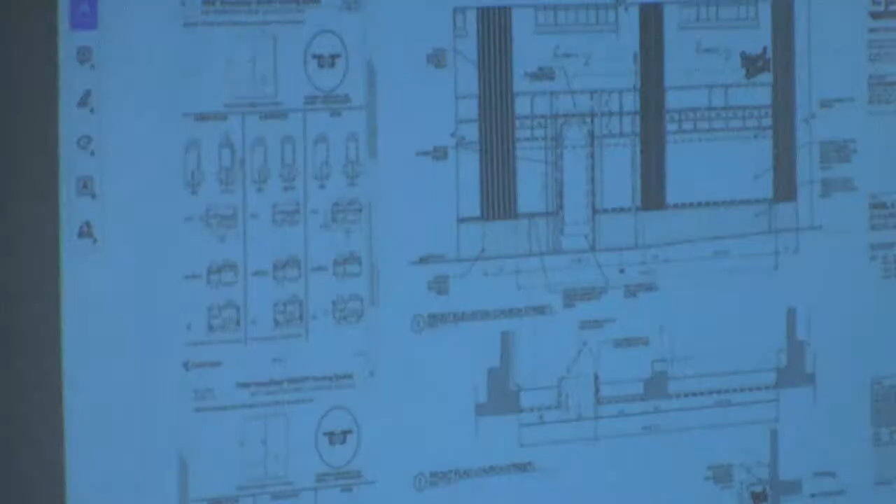Basically, that storefront, which is shown in the details on your sheet here - this is a little out of focus, but the glass is forward. The last system we had, the glass was in the middle, so you were seeing heavier shadow lines and more of the framing system itself. This one, the glass is brought forward, similar to the existing condition of the glass in the aluminum storefront that's there right now, as seen on the building's facade. Those are some of the biggest changes that happened.

And what is your proposal now for the bulkhead, the marble? What we discussed on site, when we asked if you guys would be able to mimic what that other storefront had - that conversation we had. So we're proposing that we skim coat it, and then have it mimic what was at that other storefront that we went over on site.

Okay, so I think then there was the framing system, the placement of the door, and the bulkhead were the 3 main things. We also made this door recessed as opposed to before, when it was flush. Yes, so it's pushed in a little bit as well. This was something we discussed openly on our last hearing together - the 8 inches rather than being flush. So it's being recessed back.

So the door will not be as recessed. You're bringing the door forward. We're still bringing the door forward. Currently, off the top of my head, I think it's 30 inches recessed into the storefront opening, and what we're proposing is to have that at 8 inches recessed rather than 30. So still bringing it forward, and we're still looking to meet the ADA requirements for an accessible entrance. We're also trying to improve the storefront glass by making it insulated and thermally broken.

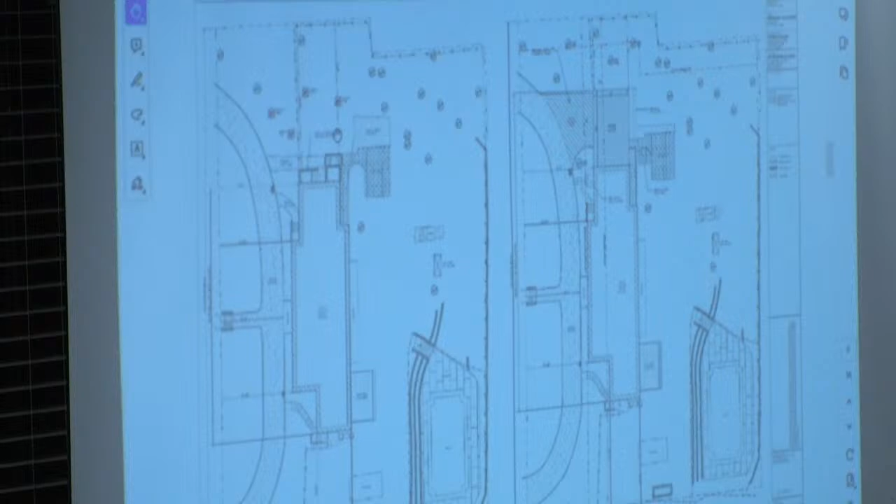So, Center Hall, Spanish Colonial Revival. On the right you have the southern extension, that's the family room with the traditional arched openings. Our addition is proposed to be on the north end, to be flush with the extension.

That extension currently houses a service stair and a mudroom. That mudroom, I think, originally was outdoor space. Right now it has infilled panels and windows, but I believe originally it was an open porch that provided access to the kitchen — essentially a service porch.

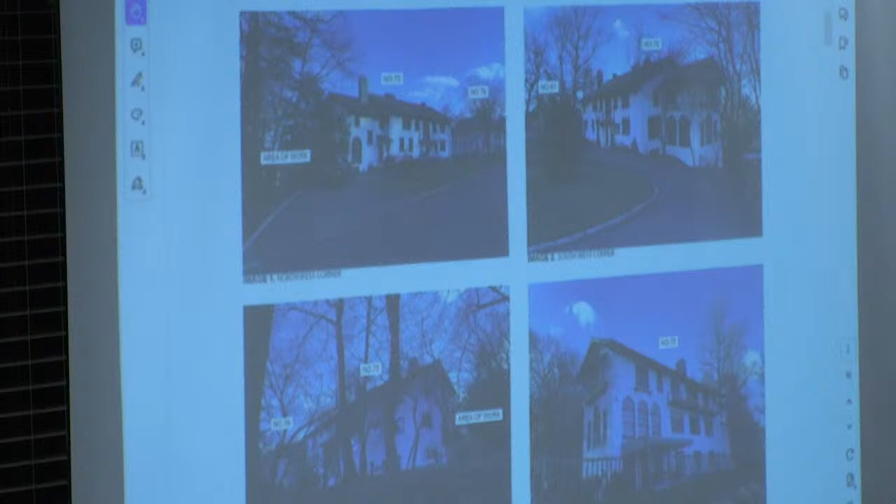In terms of mass and scale of the garage, we're proposing a minimum roof height just to allow the cars to get in, so you end up with an eave slightly over 10 feet above grade.

To the left is the existing extension roof below the main center hall roof gable. To the right is the proposed garage, which is an exact replica of the existing low slope gable roof, with an eave extension to match. As I get into the details later, the brackets, eaves, and rafter tails will all be specified to match existing.

The second part of the project is an entrance canopy for the mudroom with a bracketed canopy in the same location as the current mudroom. For that, we're proposing a hip roof, which I think is a modest complement to the central front entrance, which is flat, and then the service stair, which is a shed roof.

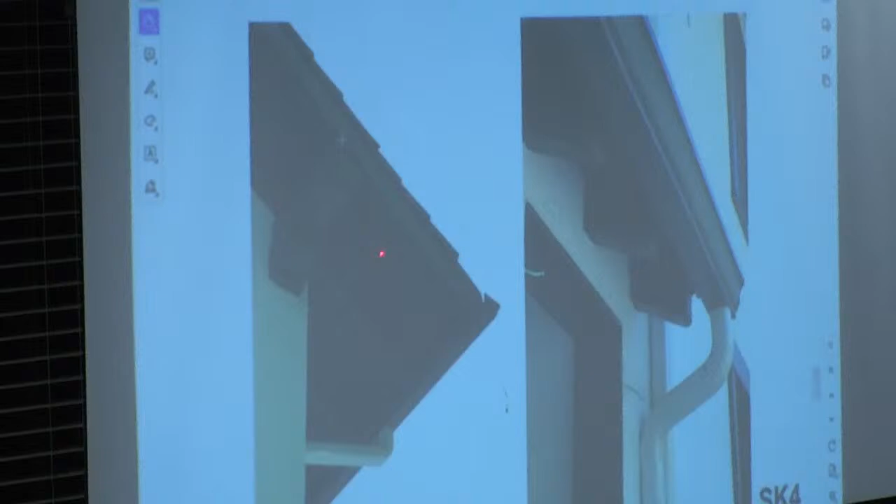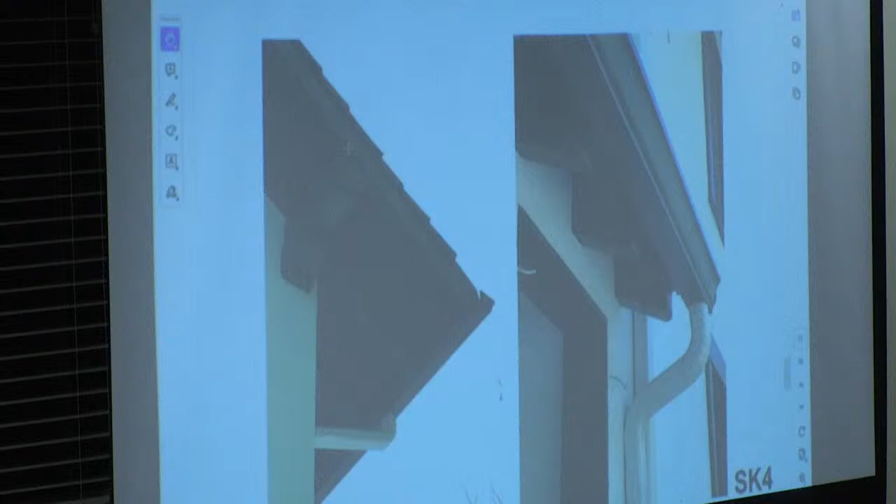For the eave details of the roof, we would match the brackets at the rake and the rafter tails at the eave. For the mudroom's new door canopy, we would match the rafter tails that are currently on the service stair shed roof.

The image to the left is the current state of the front door. It was painted. The owners would like to strip the paint down to the original wood and stain it a medium brown color.

The door to the right is the service stair entrance. They would leave that alone.

The new mudroom entry door would also be wood, stained a medium brown, and we would try to match the stained color of the refurbished entry door as well.

The garage door, because of its exposure, we think should be a faux wood door — a typical Clopay Canyon Ridge style. It's a panel door with transom lights and metal straps.

We think it should be faux just for maintenance. For the color, they have a selection, so we'll try to best match it after the doors are stained.

The windows right now are insert Andersen windows. They're black, and the trim is green.

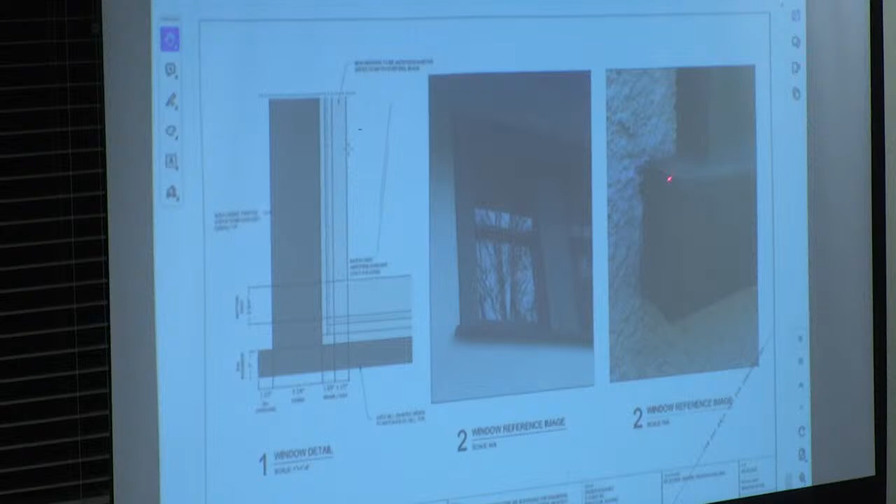The cladding for the windows and doors has been some type of vinyl covering each window and door. We would instead use something like PVC AZEK, painted to match that color and matching all the dimensions of the sill and casings, vertical and horizontal.

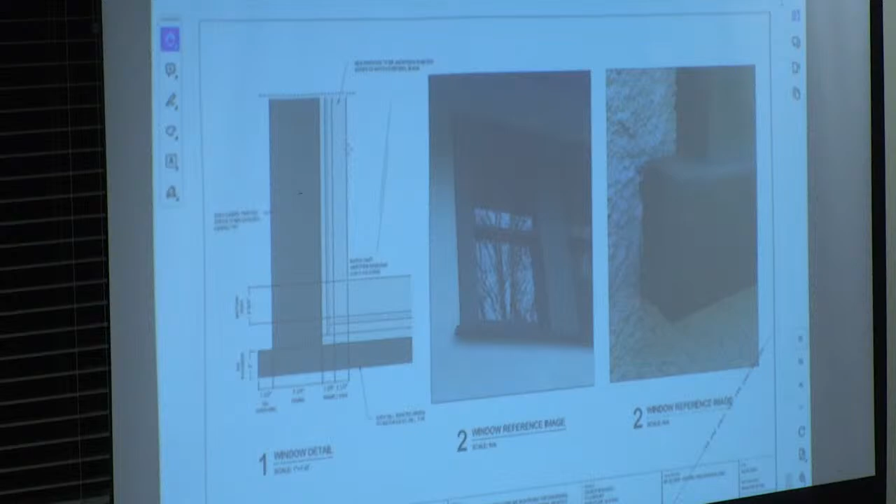And that's all I have. Okay, thank you. Maybe you could go back to your first slide that shows the layout, the floor plan. Yes, that's good. All right, thank you very much.

So we'll start with questions from the commissioners, okay? Mike?

So are you changing all of the trim everywhere to brown stain, or is it just the areas that you referenced? Just the front door. Didn't you also say the garage door was going to be that color as well? The garage door will be new, but the color will be the same as the front door. And there were no other areas where you wanted to strip the paint and stain it? Just the front door.

Okay. And then can you show the elevation where you're putting in the, can we go to the side? Is there any way to make the window, well, I guess you want to match the windows up top. I was just wondering if there's a way to call back to what's there existing, the arched door, but I guess.

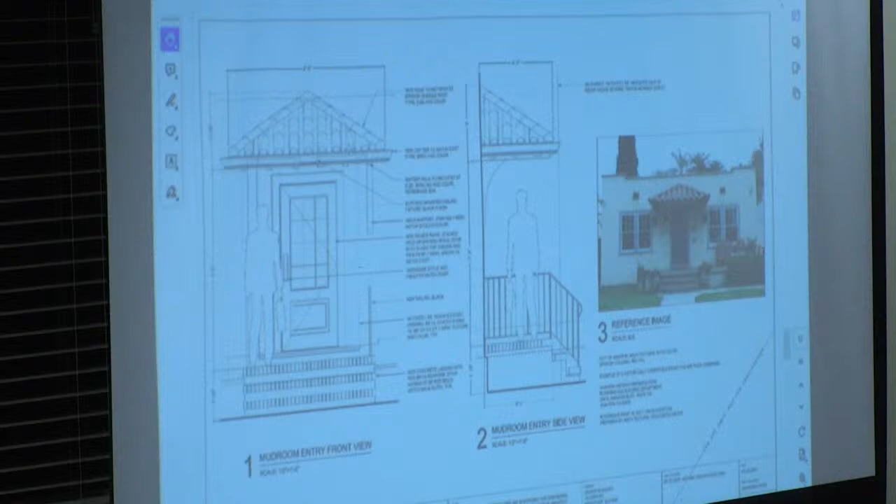To that new addition. All right, and then can I just see the new entryway also, for the mudroom? And currently they have that, is that arch original, the window that you're going to be demolishing? I think it's here. It is, right? Again, yes, original, but it was open, an open service porch.

Right, so is there any way for the design to call out that arch to keep, is there any way to keep that arch for that new door? You mean here? Yeah. Well, if you did, then you wouldn't have a canopy. I'm just thinking it would look more appropriate to the original 1912 design if you kept the arch. But it served an outdoor space, so we have a canopy for an indoor space, which is why I think this is more appropriate than an arch.

No, I understand that, but we are losing a historic element by making that change. So I'm asking if there is a way to maintain that element, the arch, because it does change the original look of the house. I agree it changes it, but I guess I would say I think this is a more attractive update of that historic look, so I'm not sure why you would want to keep that. Because it's the 1912 design, that's the reason.

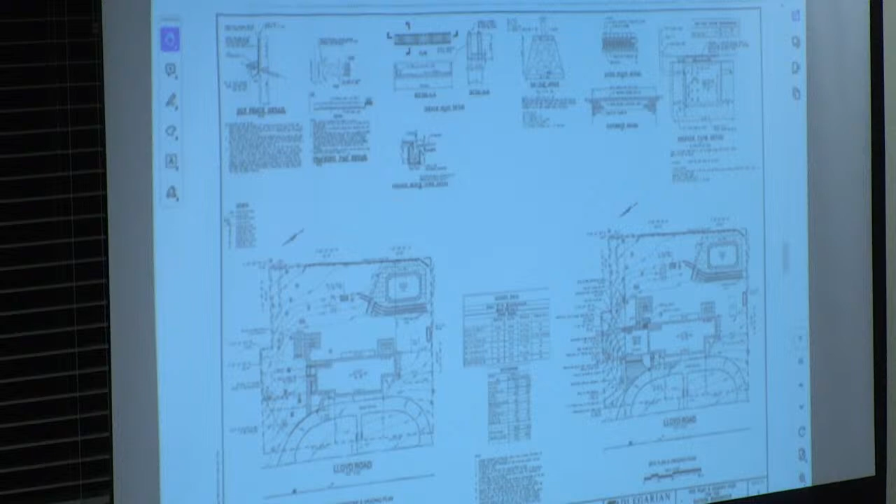So the door can't open up to the north? I don't think that's practical. Okay. I know, because we try to discourage, as you must know, front garages that open to the front. Sure.

Do a retaining wall on the rear side? Right. Okay, we've got about a 6-foot drop. If you did, a massive retaining wall would be required, yes, in a steep slope area.

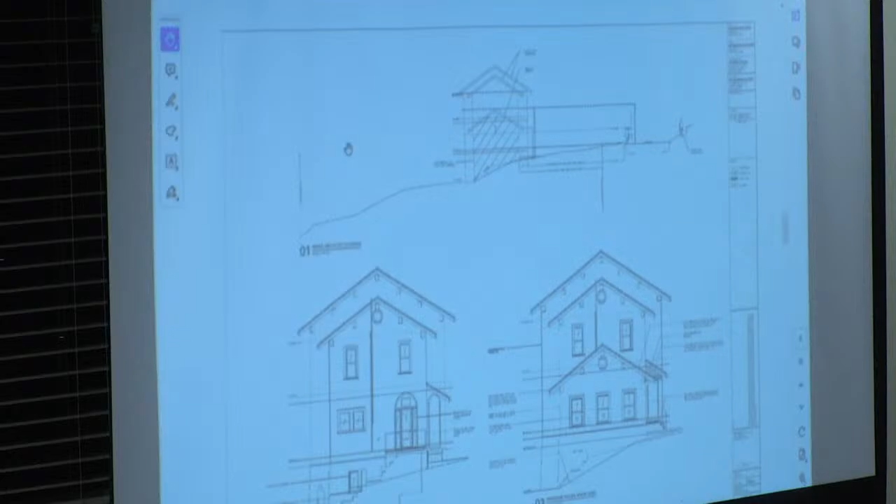Any other questions? No. Do you guys have questions? No? Yeah, we were discussing an alternative, but just to keep the arch. I have some thoughts on that too. Okay, I mean, there's arches all over. No questions? No, we finished with questions.

I questioned whether or not a garage opening to the north could work as opposed to it opening to the front, because that's what we try to discourage - garages opening to the front - although we don't have an ordinance that states that. But we can recommend that. Anyway,

You've received Mr. Smollen's comments? Yes. Okay, good. So we'll have him now, great.

Please, I love additions to historic buildings, these are always fun. I think the concept for an addition primarily touches on Secretary of the Interior standard number, I think 9, is most applicable here. I'm sure it's something this commission has tussled with many times - differentiated yet compatible.

And there's a gradient, I think, between additions that are very differentiated and almost conjectural, to extremely compatible and almost look like reproductions or reconstructions of a historic building. I think this 75 Lloyd is definitely trending toward compatible.

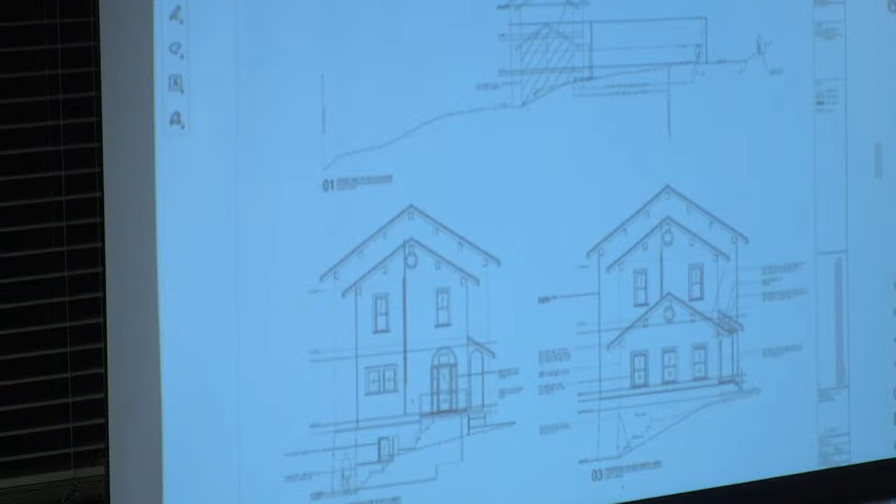Bring it back 3 feet and put the door to the mudroom 3 feet behind the arch. Right, you're talking about bringing this section of the wall back, and you'll lose space in the mudroom, but on the facade, you keep the arch. So this becomes a recessed, vaulted vestibule.

And your point is that the arch is too grand for a mudroom, I think that's what you said before. But honestly, you're looking at it from the street level, and to keep the rhythm of the facade with the arches, I think is important. And once you're in the mudroom, it'll bring more light into that space because it's going to be very dark there. Once you're in the mudroom, do you really care that it's too grand?

And is there an entryway from the garage into the mudroom? That was my other point. Yes, that door. Oh okay, so you have enough room.

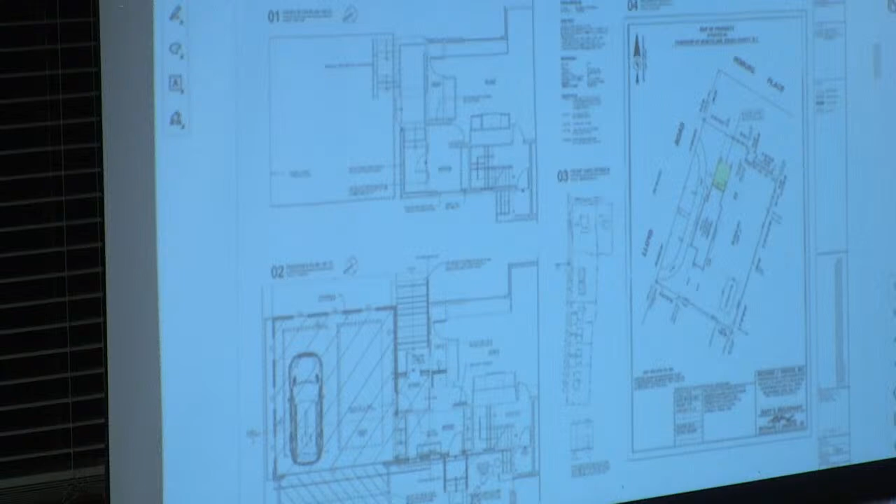So I think we're, you hear that we're supportive of the project. It's a shame that the doors have to face front, but I think the suggestions about recessing the garage, making the addition more subordinate, is valid. And the idea of maintaining the arch as part of the design, whether you put a barrel vault on it - I understand your reserve about that - but the idea of making it recessed could work.

Because you also have that little recessed entryway to the right of that too, the service entrance. It's an exterior recess, but it still plays off of each other, I think, in a good way.

In terms of putting in a driveway, we're not adding much impervious surface, so the driveway is fine. The only reason they're here is because he needs a variance, and we're making the recommendation to the zoning board. I'm surprised this place never had a garage.